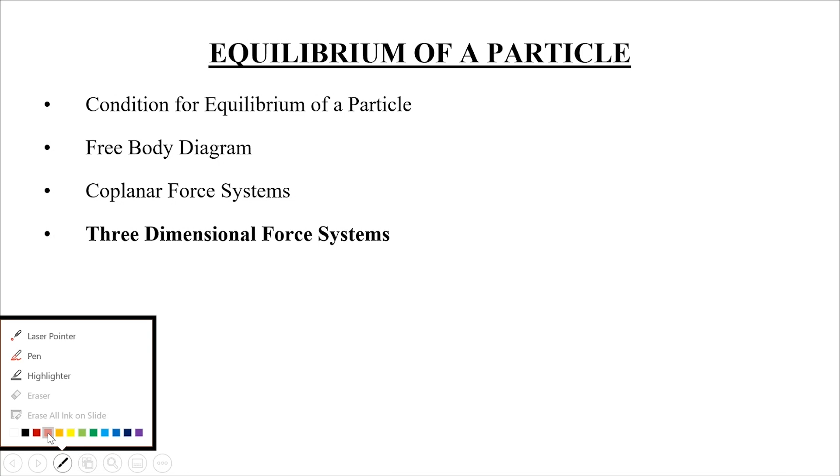First of all, continue with chapter number 3, which is equilibrium of a particle, and we will solve the exercise problems, maybe one or two exercise problems from the three-dimensional force system जो कि हमने last week शुरू किया था. Now three-dimensional force system में क्या होता है कि you are going to apply the condition of equilibrium in which three-dimensional forces are acting on a particle.

Now those conditions of equilibrium are discussed in the previous lecture as well, that there shouldn't be any unbalanced force acting on that particle. It means that summation F should be equal to 0, and then you are going to apply it along x-axis, summation Fx equal to 0, summation Fy equal to 0, and summation Fz equal to 0.

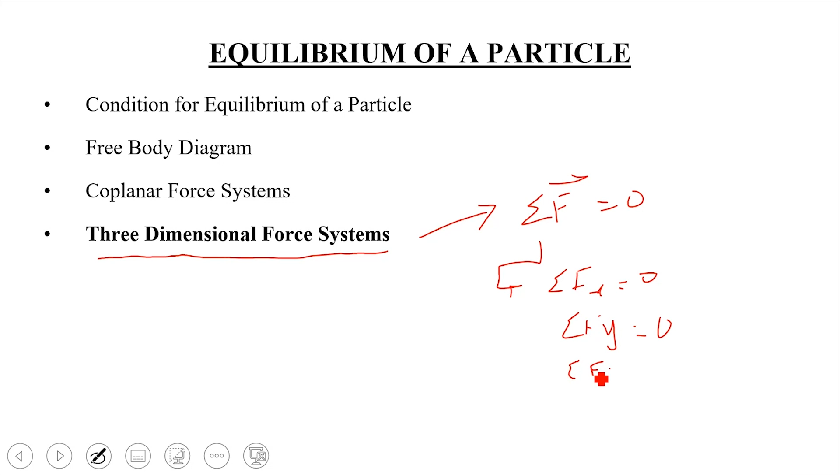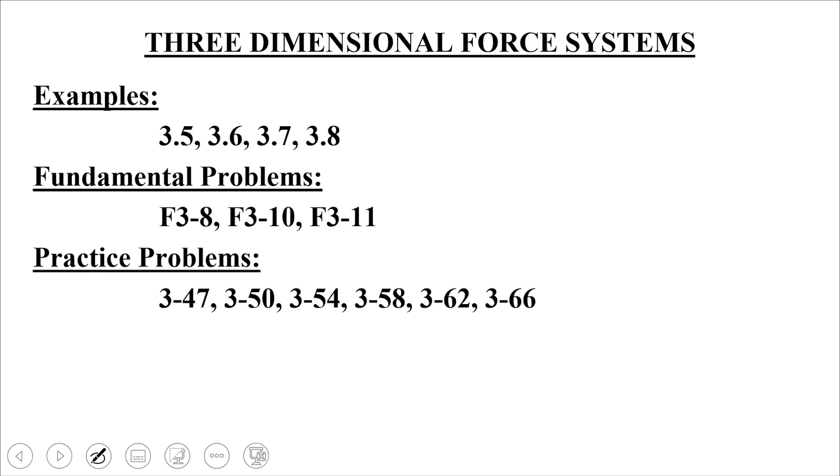Okay, starting with problem 3-47. एक अरेंजमेंट आपको शो किया गया है which is being used for catching fish from the sea or river. The shear leg derrick is used to haul the 200 kg net of fish onto the dock. You need to determine the कंप्रेसिव फोर्स.

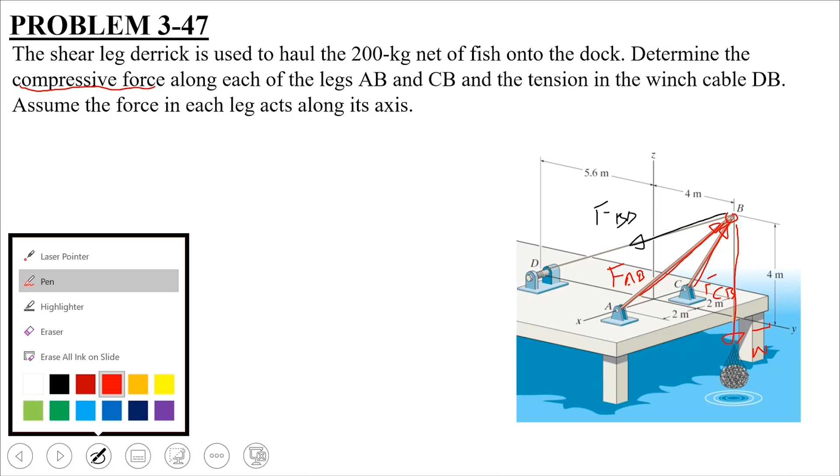So once you are drawing the free body diagram, these are the 4 forces which are being shown on particle B. In order to apply the conditions of equilibrium, it is necessary that we should have written these forces in terms of their Cartesian notation. So in order to write them in terms of Cartesian notation, we would be requiring the coordinates of points A, B, C and D.

So starting with point A, अगर हम point A से start करें, the coordinates of point A are going to be 2, 0, 0. So आपके पास point A के जो coordinates हैं वो 2, 0, 0 आ जाएंगे. इसी तरह अगर हम coordinates of point C की बात करें, this is point C.

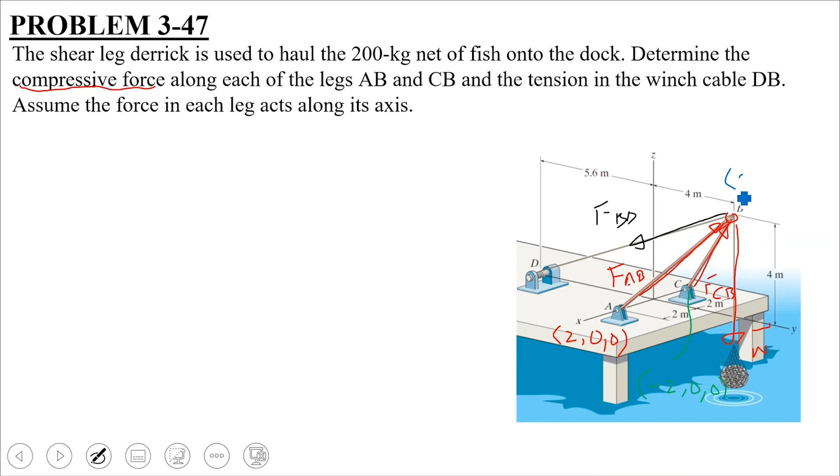So point C के जो coordinates हैं वो उसी हिसाब से सिर्फ x coordinate change होगा, -2, 0, 0. ये आपके पास point C के coordinates आ जाएंगे. Can anyone of you tell me what are the coordinates of point B? Sir, 0, 4, 4. Okay, the x coordinate is 0, y coordinate is 4, as well as the z coordinate which is also 4. So आपके पास A, B और C के coordinates आ गए हैं.

Finally आपके पास point D बचा है. So once you take a look at this point D, इसके coordinates जो है वो x coordinate 0 है. y coordinate की अगर मैं बात करूं तो ये 5.6 है, but towards the negative y axis, so I can write it as -5.6, और z coordinate भी मेरे पास 0 आ गया. So 0, -5.6, 0 are going to be the coordinates of point D. So आपके पास चारों forces के लिए coordinates आ गए.

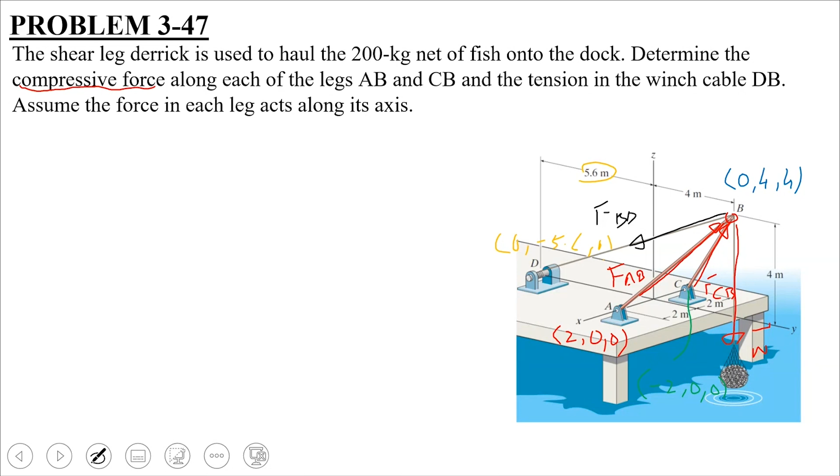Now you are going to apply the conditions of equilibrium by first writing these forces in terms of their Cartesian notation. So FAB को अगर आप Cartesian notation में लिखना चाहते हैं, so it is going to be like this, which is FAB times UAB, which is the unit vector along AB. और unit vector आपने कैसे लिखा है? You have defined a position vector from A towards B, और उसको उसके magnitude पे divide कर दिए. You are going to get FAB in terms of its Cartesian notation.

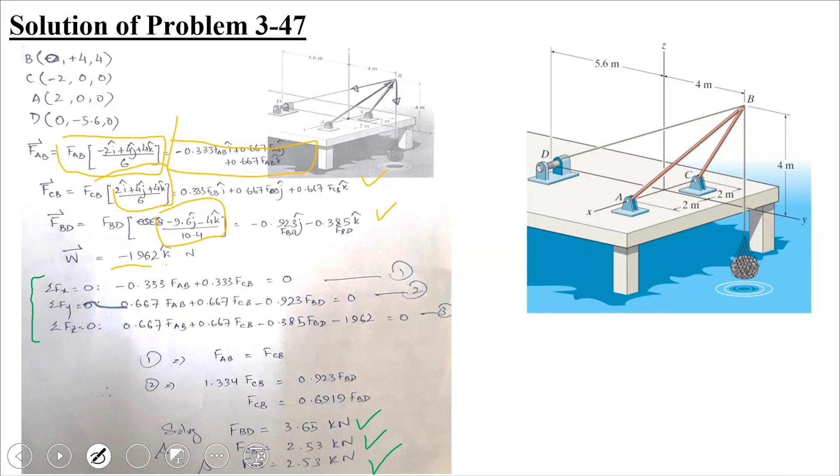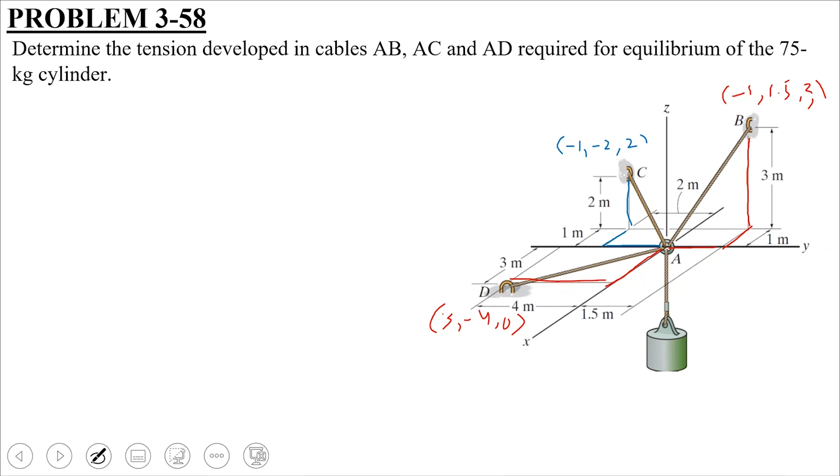Now you need to draw the free body diagram of point A. So this is going to be the force which is named as FAB acting in this cable AB. Then you have another force which is this FAC acting in this cable, and finally this force which is FAD acting in cable AD. All these 3 cables are supporting the weight which is acting downward. So weight would be acting downward, which is equal to 75 into 9.81 Newton.